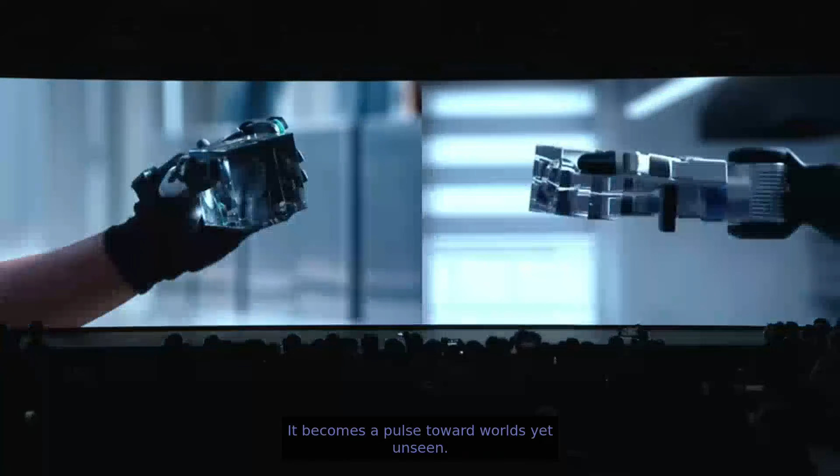Every step forward opens a new path. It becomes a pulse toward worlds yet unseen. Today, robots learn from humanity. Robots learn from robots, and systems learn from systems. We meet as partners to further evolve.

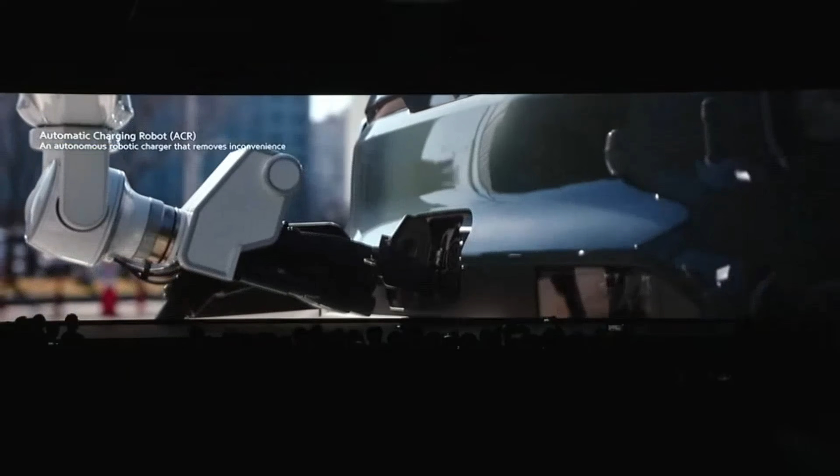With AI robotics at our side, our potential expands, guiding what matters most, giving us courage to push beyond limits, and the collective strength to share the burden. The road ahead brings us a liberated everyday life, safer from risks and freed from repetition. Together, we move forward to achieve the next innovation.

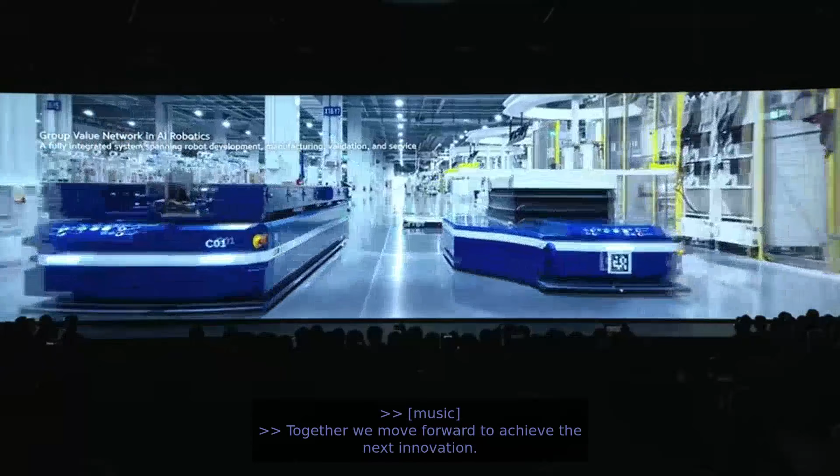Every moment creates a trail of data where humanity and AI robotics open a greater cycle of progress and awaken the dawn of infinite possibility. Partnering human progress.

Good afternoon. I'm Zach Jakowski, and I'm the VP and General Manager for Humanoid Robots at Boston Dynamics. And I'm Aya Durbin. I lead our humanoid application product strategy at Boston Dynamics. Wow, it's incredible to finally show the robots we've worked so hard on at such a big global stage. How do you feel, Aya? I feel the same. I'm excited and honored to be here.

For the last 30 years, Boston Dynamics has pushed the boundaries of the possible. Hundreds of millions of people from around the world have watched our journey online, captivated by the future coming to life before their eyes. And while the robots are impressive, the truth is that many of us joined the company for a simple reason: to change the world for the better.

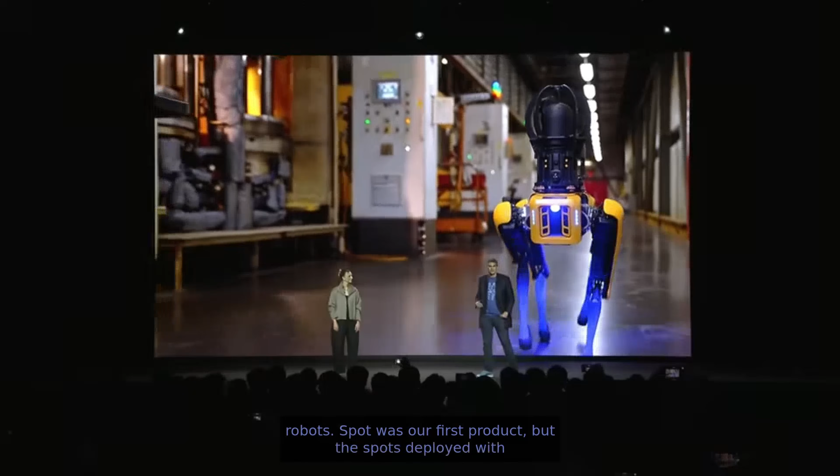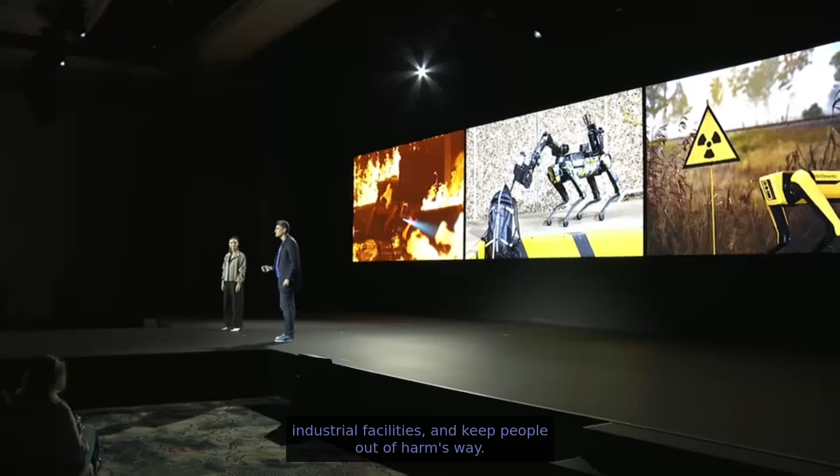Earlier you saw a cool dance performance from our Spot robots. Spot was our first product, but the Spots deployed with customers don't have time to dance. Those Spot robots collect data, reduce downtime in industrial facilities, and keep people out of harm's way. Over the past 5 years, we've deployed thousands of Spots to hundreds of customer sites in over 40 countries. Spot is a serious commercial success.

We launched Stretch in 2023 to bring total flexibility to warehouse automation, starting with truck and container unloading. This is a back-breaking task done in sweltering heat and chilling cold. Stretch has now unloaded more than 20 million boxes for our customers. These are real examples of how the robots we build make workplaces safer and people more productive.

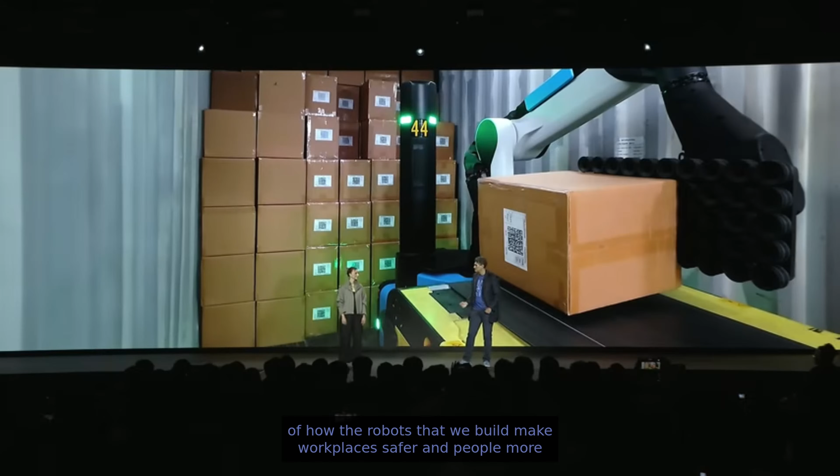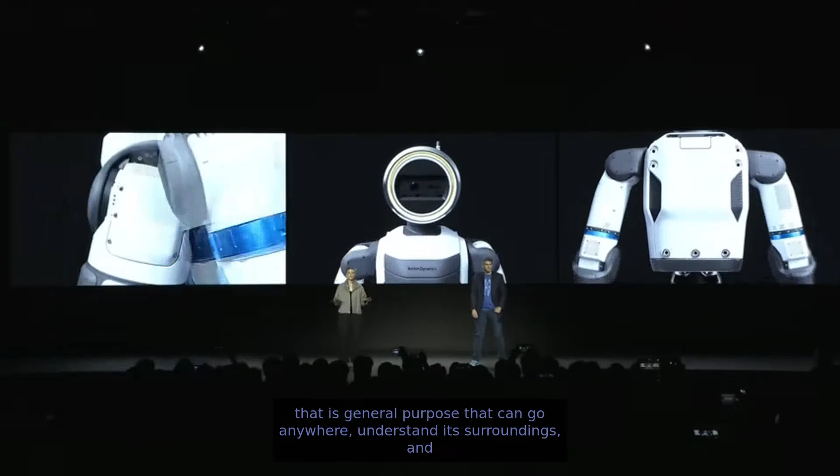So what's next? Our vision is a humanoid that is general purpose, that can go anywhere, understand its surroundings, and manipulate any object. We're starting in industrial environments first, building a tool that can drop into your facility as it exists today. It doesn't just do one job, but is flexible enough to evolve as your business changes.

Over the last few years, we've visited hundreds of customer sites, walking the floors with the people who understand their operations best. We've learned that to bring Atlas from a prototype to a product, it needs to be safe, reliable, and predictable. Atlas needs to be doing jobs that are repetitive, exhausting, and increasingly difficult to staff. As we did with Spot and Stretch, we're partnering with the best in the business, learning directly from the people who will use our products most.

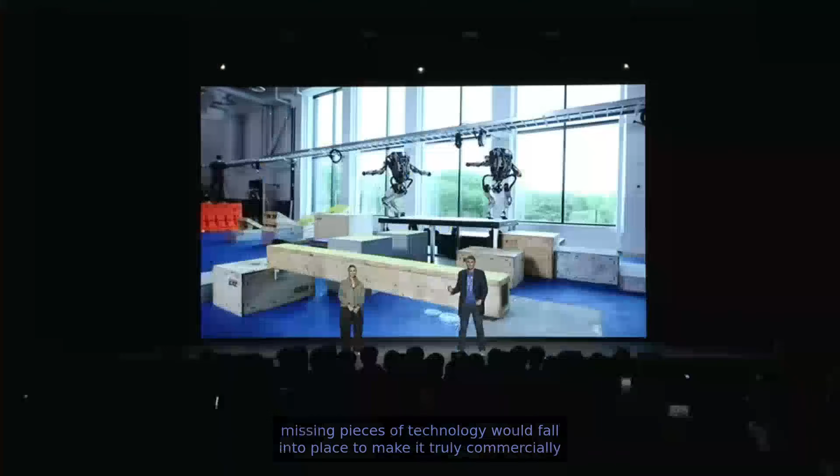But to realize this vision, we needed a robot built for the rigors of industry. We've been working on humanoids for more than a decade at Boston Dynamics, always watching for when the missing pieces of technology would fall into place to make it truly commercially viable. The rapid advancements in AI over the past few years are the piece we needed, and that moment is finally here. Now it's time to officially take Atlas out of the lab. For the first time ever in public, ladies and gentlemen, please welcome Atlas to the stage.

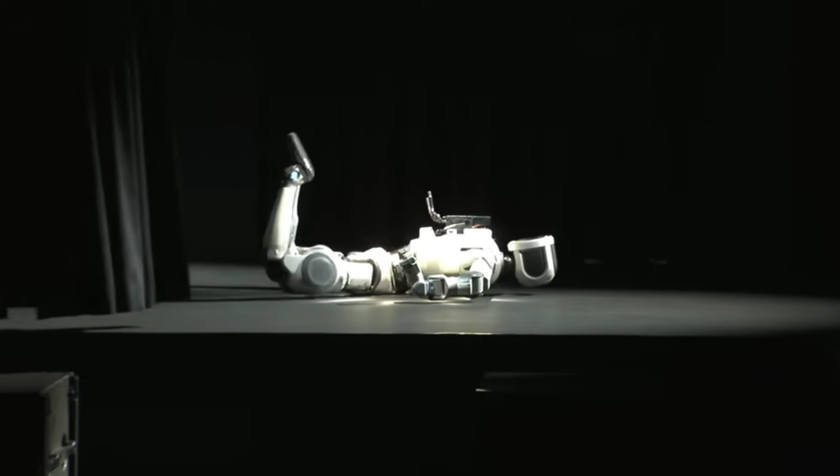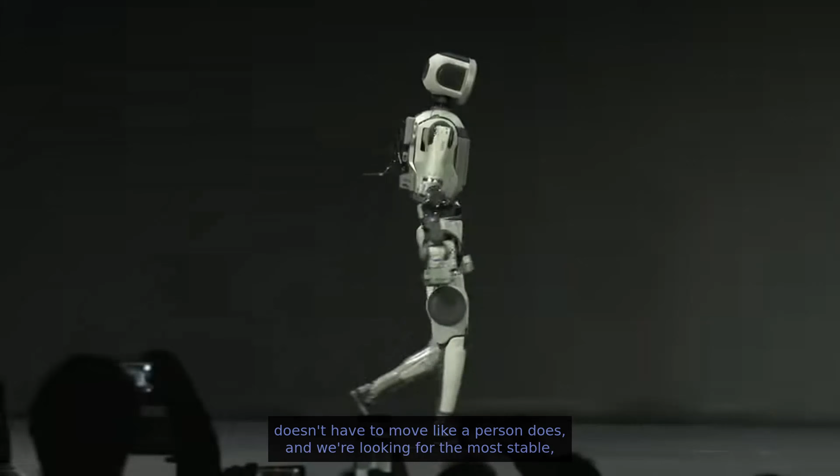So as you can see, Atlas really does stand up the way that we show in our videos online. And we get tons of questions about this. Zach, while we have everyone here, do you want to provide a little bit of insight into how we made that decision? I mean, it's pretty simple. Atlas doesn't have to move like a person does, and we're looking for the most stable, efficient way to get up, and it turns out this is it. The other question we get all the time is how Atlas is moving.

So as you can see, Atlas really does stand up the way that we show in our videos online. And we get tons of questions about this. Zach, while we have everyone here, do you want to provide a little bit of insight into how we made that decision? I mean, it's pretty simple. Atlas doesn't have to move like a person does, and we're looking for the most stable, efficient way to get up, and it turns out this is it. The other question we get all the time is how Atlas is moving.

How is Atlas moving today? In normal operation, Atlas is fully autonomous on a job site, but today, Sarvesh, one of our FAEs, is piloting Atlas on the stage, giving it really simple instructions like forwards and backwards, just to keep things simple.

This is Atlas's first time in public, and as you can see, its walk is pretty natural and pretty smooth. We've partnered with our sister organization, the Robotics and AI Institute, to push the limits on natural walking just for this performance, and I think we've done something really special.

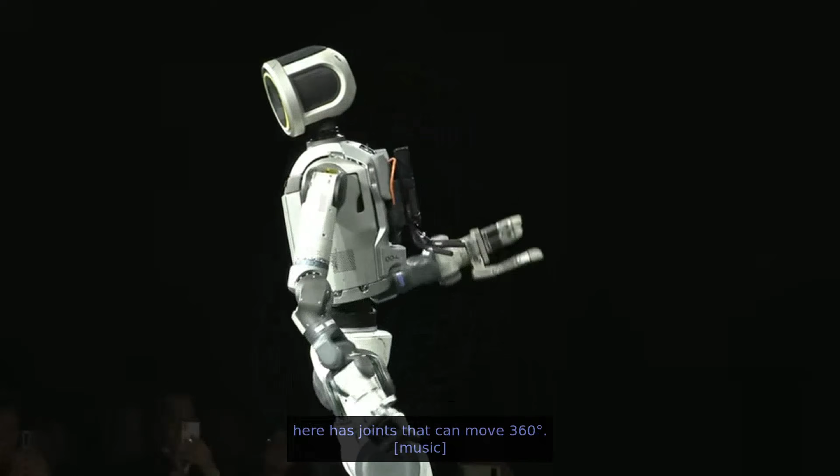We've also been at this robotics thing for a while, and we've learned that there's more to it than just copying nature. We can pick the best parts of what nature has to offer and do better in others. So as you can see, Atlas here has joints that can move 360 degrees. This lets Atlas move even more efficiently than humans, particularly in manufacturing environments where every second counts.

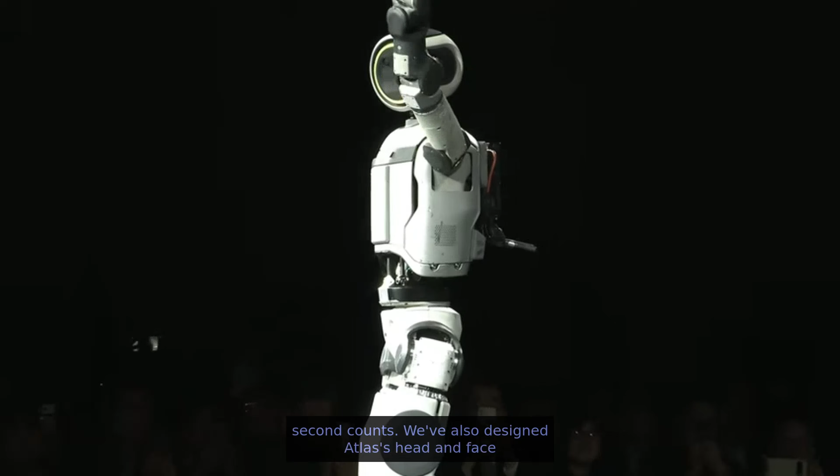We've also designed Atlas's head and face very purposefully. We want folks working with Atlas to know that Atlas is a helpful robot, not a person.

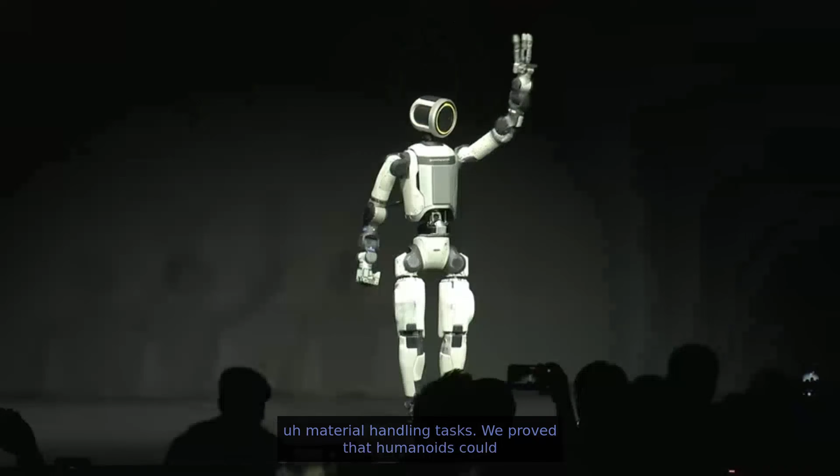Seeing Atlas live in action for the first time is wildly exciting, but seeing it perform real industrial work is even more compelling. We recently took this robot down to the Hyundai Motor Group Metaplant America to have Atlas tested in a real manufacturing facility, where we performed autonomous material handling tasks. We proved that humanoids could be viable in a real-world application, and we collected data and learnings that we took back to Boston to make our product even better.

If you would like to see what one of those applications looks like, we will be running live demonstrations all week long in the Hyundai Motor Group booth at CES. And that's not all. We have been hard at work on the hardware itself. We are building out the functionality that our customers need in a product deployed at scale.

Zach, you want to talk about it? Of course I do. The version of Atlas that you're seeing here is just a research prototype that we've been using for a couple years to understand the system. But we've been hard at work on making the actual product version of Atlas. I can confidently say that this product version of Atlas is the best and actually simplest robot that we have ever built. But rather than just talk about it, why don't we actually show you what it's going to look like?

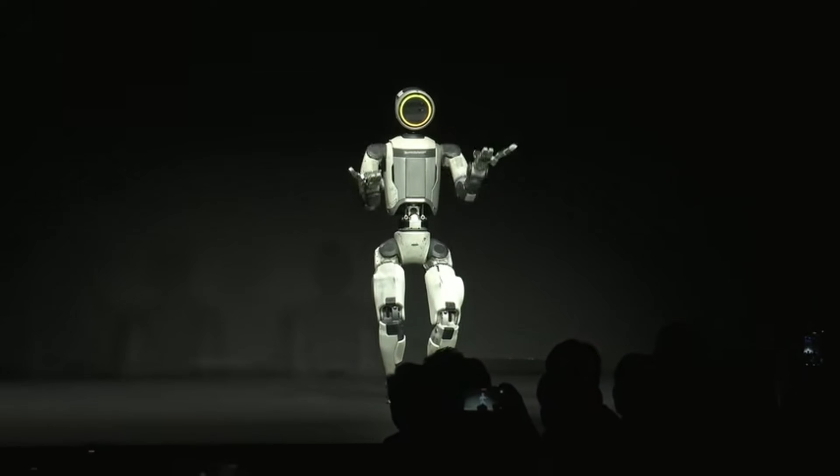Now, obviously, this is a static display robot. We just couldn't pry the actual production samples out of our engineers' hands at the lab this week. So we're going to be showing you videos of that robot in the coming weeks.

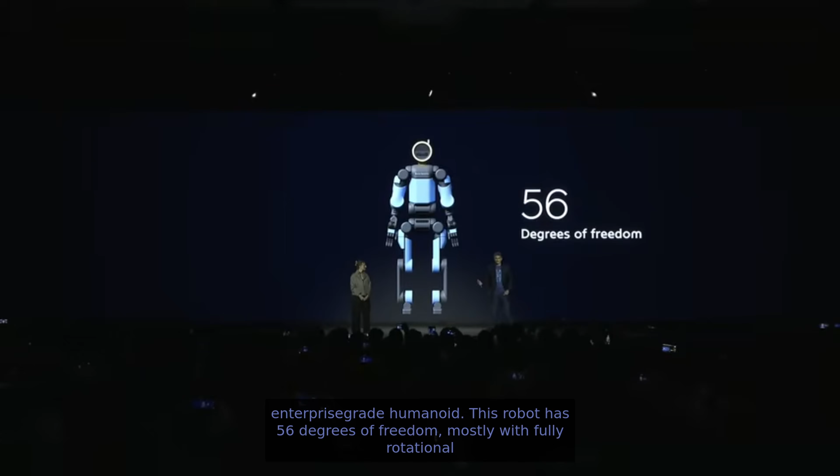This product generation of Atlas surpasses any other enterprise-grade humanoid. This robot has 56 degrees of freedom, mostly with fully rotational joints, and it has human-scale hands with tactile sensing in the fingers and palms for dexterous manipulation.

Atlas's 360-degree cameras see in all directions, so it understands when people are approaching, which is part of our holistic safety concept. Atlas is also strong.

It can lift up to 110 pounds and reach up to 7.5 feet in the air. Atlas is also water resistant. In real industrial environments, robots need to undergo washdowns, and it can operate at its full capabilities, including strength, between -4 and 104 degrees Fahrenheit.

It's going to be easy to teach Atlas new tasks. Most can be trained in less than a day. Atlas can perform these tasks at a reliable, consistent pace for about 4 hours using its dual swappable batteries.

And when they run low, Atlas navigates back to its charging station and swaps its own batteries, getting right back to work. Finally, Atlas robots share intelligence. Through our Orbit platform, once one Atlas learns a skill, it can be shared with any other Atlas.

These industry-leading specs, along with our industry-leading foundation models, allow Atlas to take on challenging tasks that Atlas will do autonomously on its own from day one, assisting people and prioritizing a collaborative, human-centric approach. And as we continue to build out our general-purpose technology, our customers will be able to use our Orbit software to teach Atlas new and specialized skills.

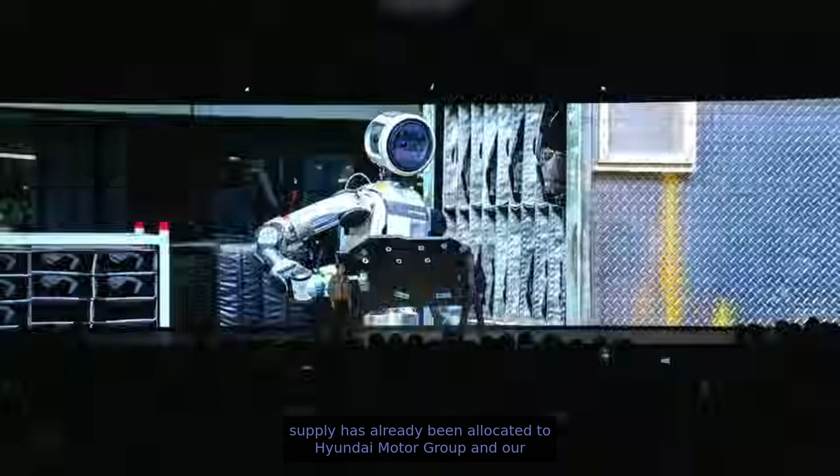We'll add more new customers in 2027. But for now, we're planning additional pilots at Hyundai Motor Group and building a facility that we call the Hyundai Robotics Metaplant Applications Center. This center is the cornerstone of our plan to build the most complete data set in the world to train humanoid skills in manufacturing, creating an engine for deploying tens of thousands of Atlas robots across Hyundai Motor Group facilities worldwide.

It's a data factory. Hyundai Motor Group isn't just deploying the Atlas robots either. They are going to build them. Together, we are building a new robotics factory capable of producing 30,000 Atlas robots a year. This is what's truly required to deliver the full promise of humanoids across the industrial, commercial, and home markets.

We are so excited to bring Atlas into the world. Visit the Hyundai Motor Group booth this week in the Convention Center to see more. And now, to share how Hyundai Motor Group will accelerate Atlas deployment, please welcome Sin-Hyun to the stage.

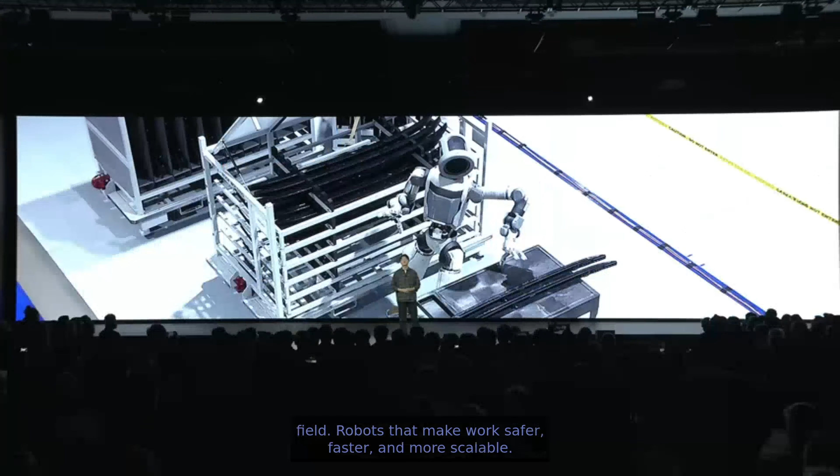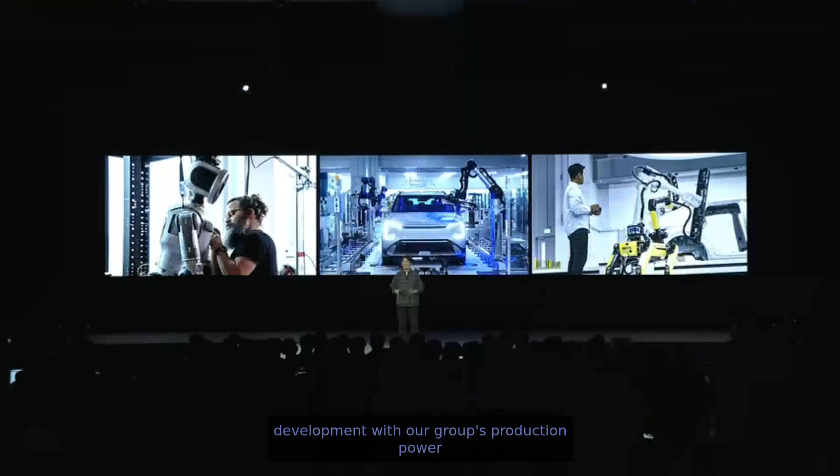Technology not for show, but for real, for measurable, positive impact. We take Boston Dynamics' top research and development with our group's production power. Among all robotics players, this collaboration is unique.

Here, we follow a shared three-step development approach. We are speeding up how our robots learn physical skills. We train them on data from Hyundai Motor Group's factories. Turning data into robot motion requires a central engine. That engine is RMAC, the Robot Metaplant Application Center in the US.

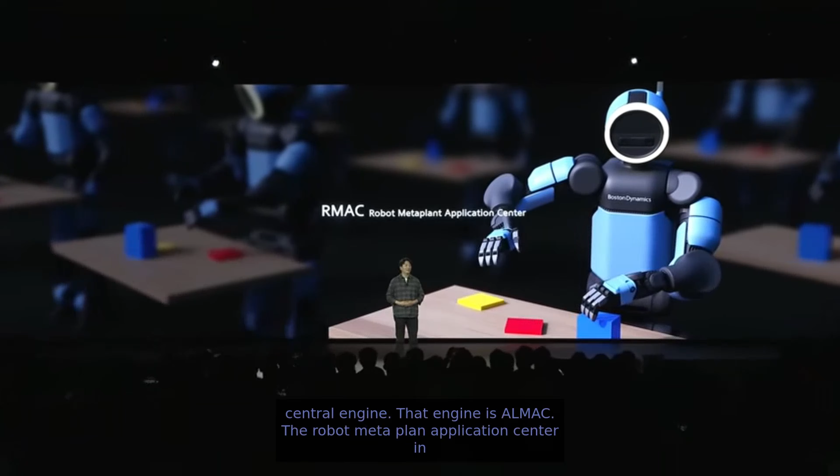RMAC drives robot experimentation, validation, and training. It anchors our robotics business and trains the robotics workforce.

Accelerating physical AI capabilities takes more than a physical hub. It also takes cutting-edge technologies. That's why we partner with cutting-edge global tech leaders. One of these valuable partners is NVIDIA. Their AI infrastructure and development tools help us innovate robots faster, streamline development cycles, and deliver scalable solutions.

We are also activating our group value network affiliates and applying their mass production expertise from cars to robotics. Each affiliate plays a distinct role. Hyundai Motor Company and Kia provide manufacturing infrastructure, process control, and production data. Hyundai Mobis works closely with Boston Dynamics to develop high-performance actuators. By combining their expertise, they're helping standardize key components and build a strong global supply chain for the group's robotics platform.

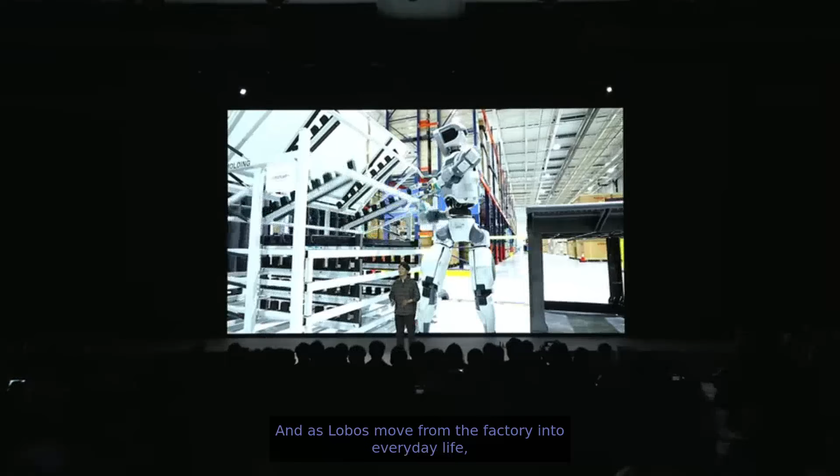And as robots move from the factory into everyday life, this approach will be just as important for people at home, which means robots have to prove themselves in the factory first, then they are allowed to do housework in the home.

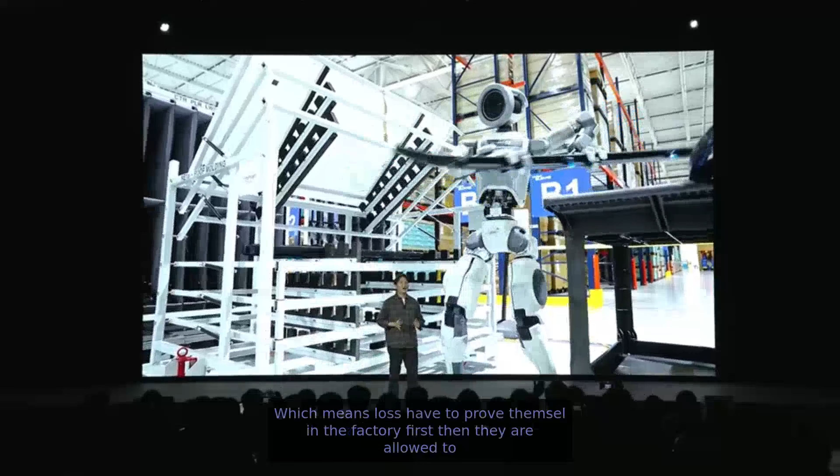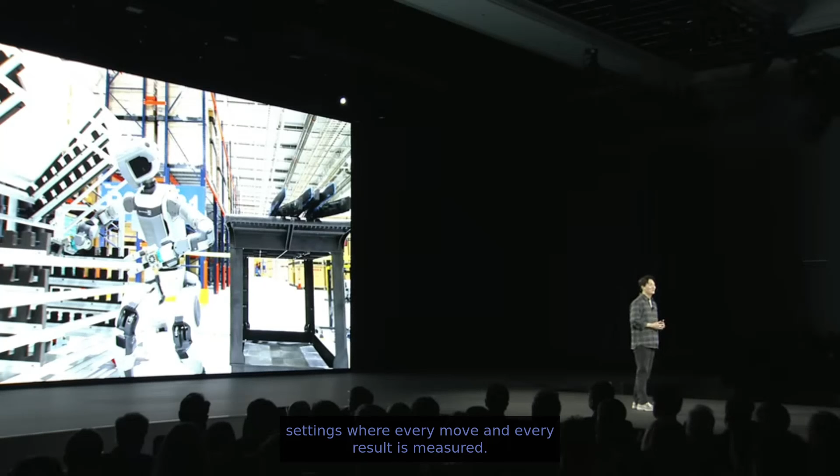Others show staged household robot demos. We prove real performance in industrial settings where every move and every result is measured. That's how we build credibility.

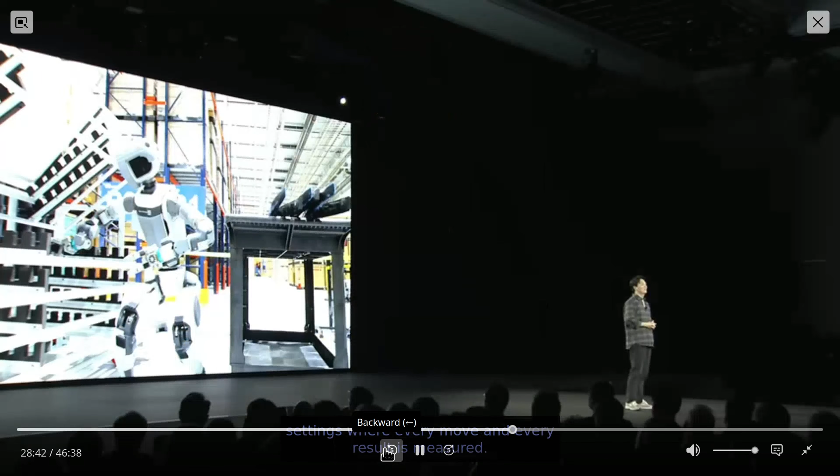Proven inside Hyundai Motor Group, expanded to the world. By 2030, we plan to sell 9.8 million vehicles per year. On that scale, Atlas moved from pilot to mass production, rolling out across our global manufacturing network to support our expansion targets. And the demand will go far beyond manufacturing, like logistics, energy, construction, and facility management, where safe, intelligent, scalable robots add real value.

Today, Spot and Stretch are already operating at customer sites outside Hyundai Motor Group in numerous use cases. In the future, Atlas will play a core part as we expand across diverse industries with a wide variety of applications.

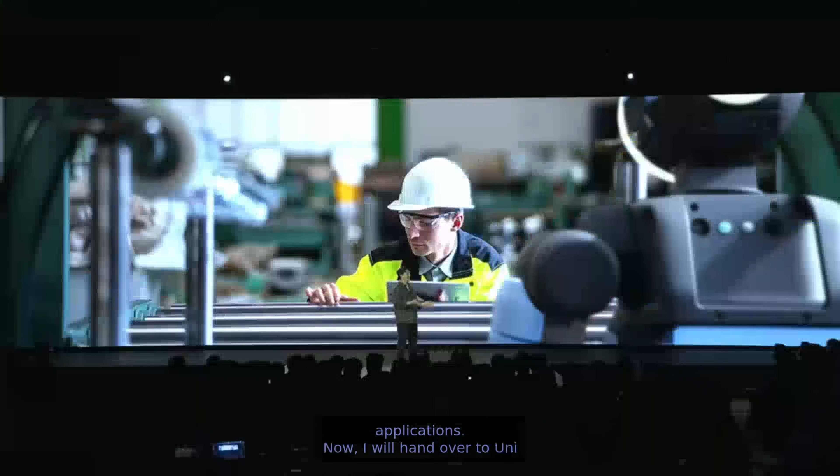Now, I will hand over to Ungjae Lee from Manufacturing Solutions. He will show how we will bring this vision to life, from training to deployment to scaling human-centered AI robots globally. Please welcome my dear colleague, Ungjae Lee.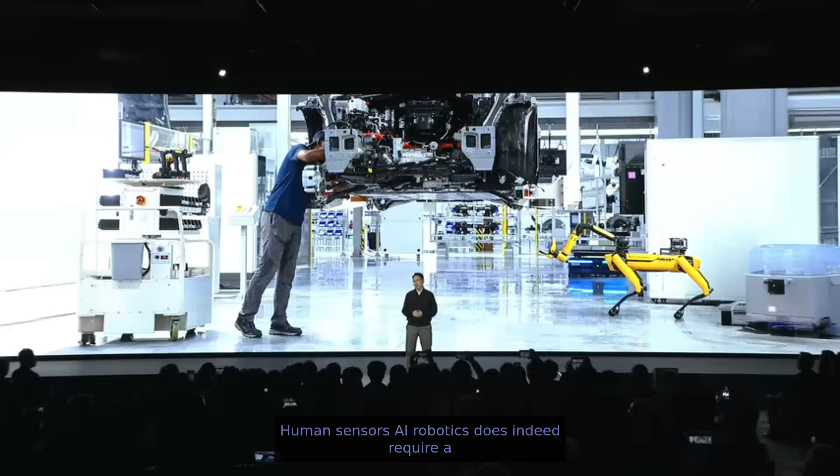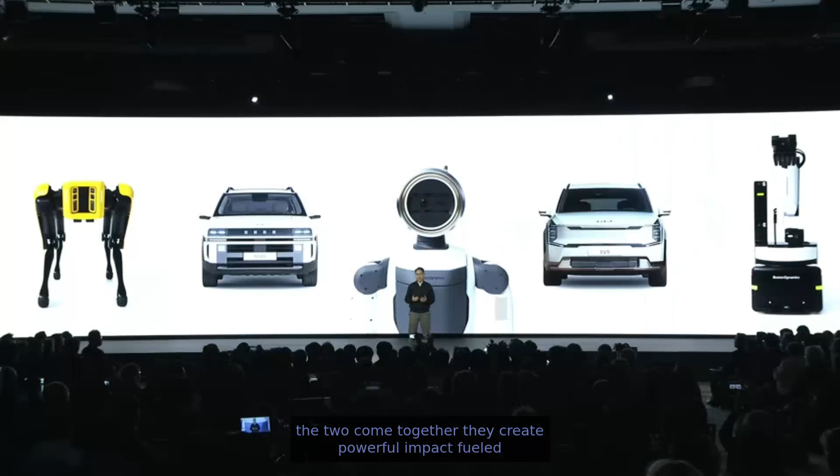Human-centered AI robotics does indeed require a bold vision, and it takes two bold partners to bring that vision to life. Boston Dynamics has world-class problem solvers. Hyundai Motor Group delivers the power of scale in production, and when the two come together, they create powerful impact, fueled by one of the most precious resources of our time: data.

At Hyundai Motor Group, we have a unique advantage. We connect mobility, manufacturing, logistics, and robotics into one integrated loop. This holistic modeling of cross-domain data is changing everything, even factories.

We are shifting from hardware-driven plants to software-defined factories, also known as SDF. They run 24/7. They're more flexible, safer, and smarter. Software lets us update, improve, and share intelligence across our global plant network.

That is how Hyundai Motor Group will grow a connected SDF system, each learning from the others, each lifting the whole network. Our first SDF, HMGICS, is already up and running in Singapore. We'll grow from there, connecting data, people, and technology across every plant in the Hyundai Motor Group.

Our SDF roadmap has one goal: achieve the best for our customers. We aim to adapt faster to local demands, raise product quality beyond today's benchmarks, offer better prices through efficiency, and improve employee safety.

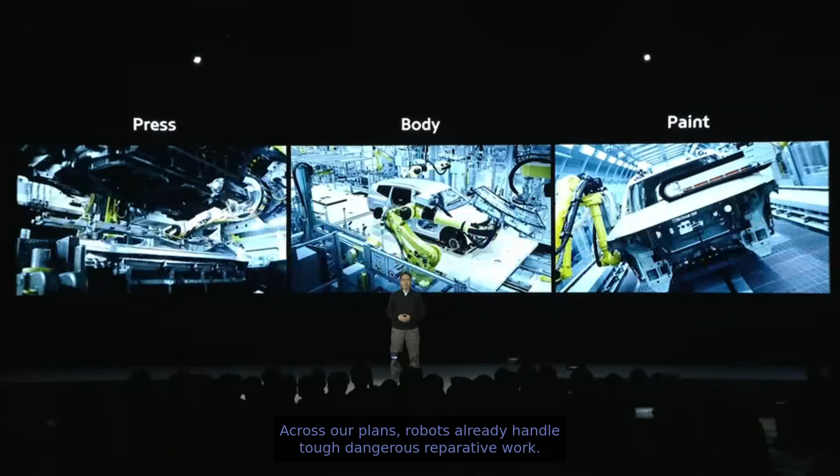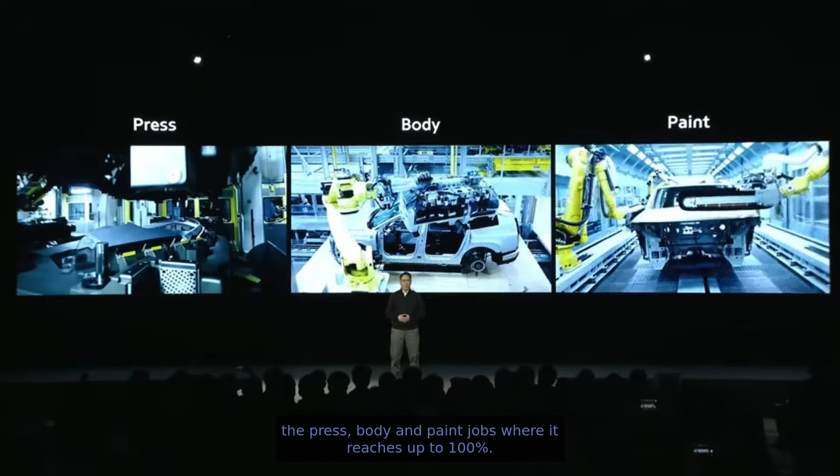SDF is also optimized for better collaboration between humans and robots. Across our plants, robots already handle tough, dangerous, repetitive work. Automation delivers clear benefits in the press, body, and paint shops, where it reaches up to 100%.

It promotes productivity, strengthens quality, and most importantly, keeps people safe. It's the unique approach of Hyundai Motor Group: human-centered automation. Even in a highly automated era, people remain essential, supervising, guiding, and maintaining robot colleagues, always retaining full control.

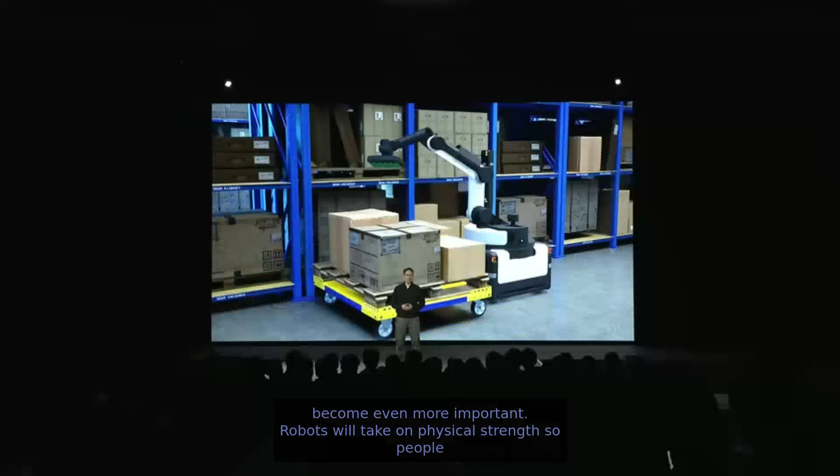As automation grows, the human role will become even more important. Robots will take on physical strain, so people can focus on oversight, decision-making, and problem solving. People will lead through software, using digital twins to test scenarios, adjusting workflow with data-driven precision.

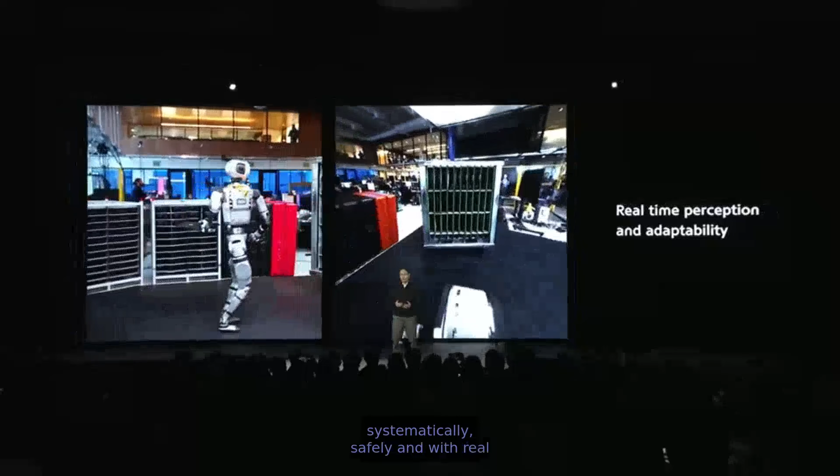But this doesn't happen overnight. The tasks must be trained systematically, safely, and with real-world context. That's the purpose of RMAC, which will be located here in the US.

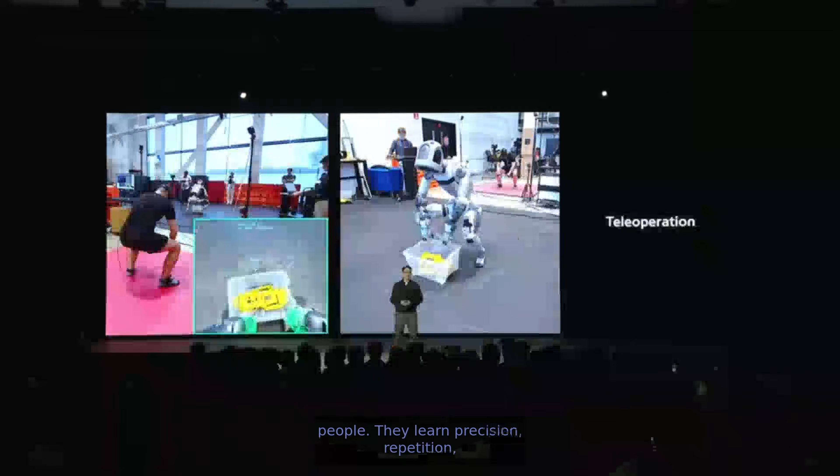RMAC is where robots learn to work with people. They learn precision, repetition, and safety by mapping human movement into robot learning. Every lead, turn, and recovery motion, all captured as real operational data.

No company has more real-world factory data than Hyundai Motor Group because our SDF network is global and well-connected. This data creates better training. Better training creates safer, smarter robots, and smarter robots create better factories for people. Big input, great output. Our roadmap is clear.

The RMAC opens this August and creates the basis for future robots. By 2028, the Atlas global rollout begins within our SDF network. Atlas will start to perform high-precision sequencing tasks. By 2030, robots will handle complex assembly.

Together, with our robot colleagues, work is safer, lighter, and more meaningful. Because our robots don't compete with humans, they compete for humans. For our safety, efficiency, and well-being. This is the Hyundai Motor Group's robotics philosophy. Robots expanding human reach and partnering for human progress.

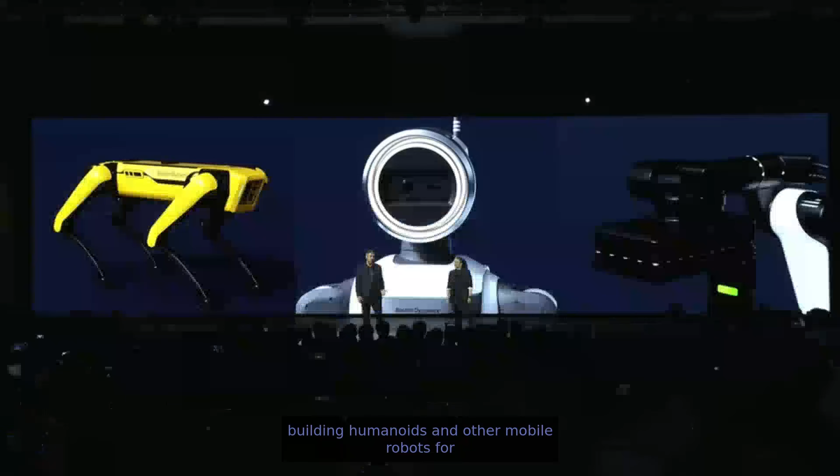At Boston Dynamics, we've been building humanoids and other mobile robots for more than two decades now, and a central focus of our work has always been physical intelligence. So imbuing our robots with a mastery of force and motion that has allowed us to demonstrate incredible athletic feats, as well as deploy them in real-world environments where they work for months at a time without failure. And all that work has led us to here, to today, to the new generation of Atlas, the world's most physically capable humanoid robot.

But making Atlas into a product requires more than athletic performance. For humanoids to really deliver on their promise, they have to be able to interact with people naturally. They have to be able to understand and adapt to ever-changing real-world environments, and they have to be able to accomplish real complex dexterous manipulation tasks. And I hope you agree with me that recent advancements in AI have created a clear path to get to those capabilities, which has spurred our commercialization journey for Atlas.

And that's why I'm so excited about announcing today our partnership with Google DeepMind's robotics team. This partnership sits at the world's leading intersection of robotics and AI. And we believe it will take us to a new era of human-centered AI robotics. What do you think, Carolina?

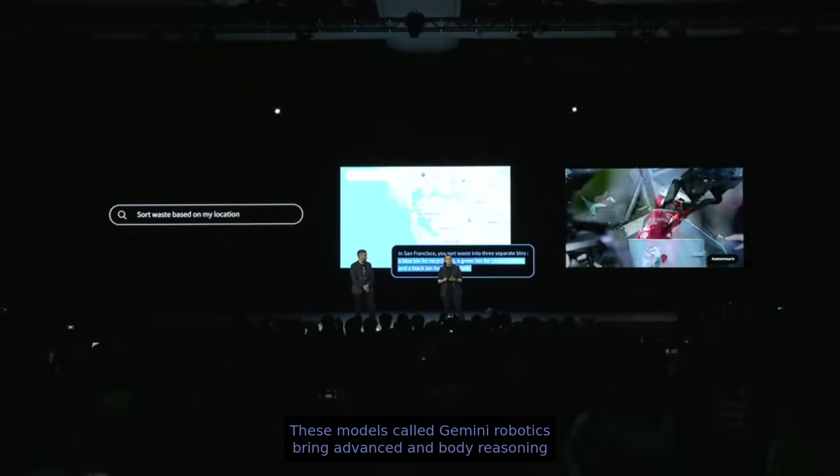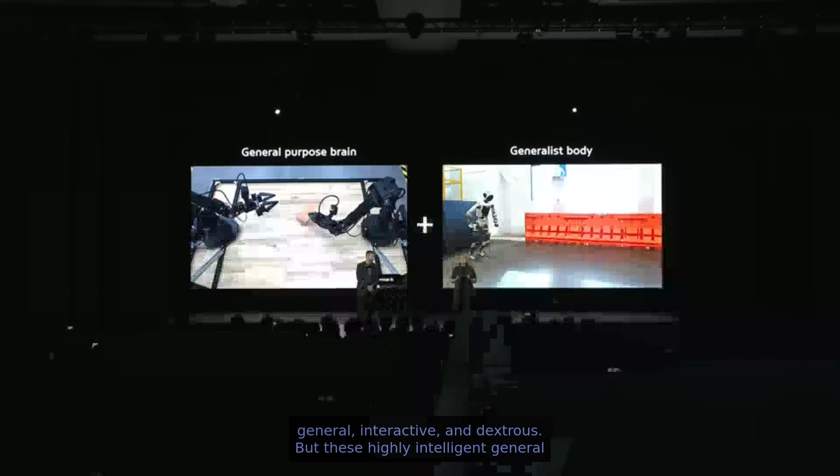These models, called Gemini Robotics, bring advanced embodied reasoning and generate actions that can directly control a robot in a way that is general, interactive, and dexterous. But these highly intelligent general-purpose robot brains are most powerful when combined with a highly capable generalist body. And that is what brought us together.

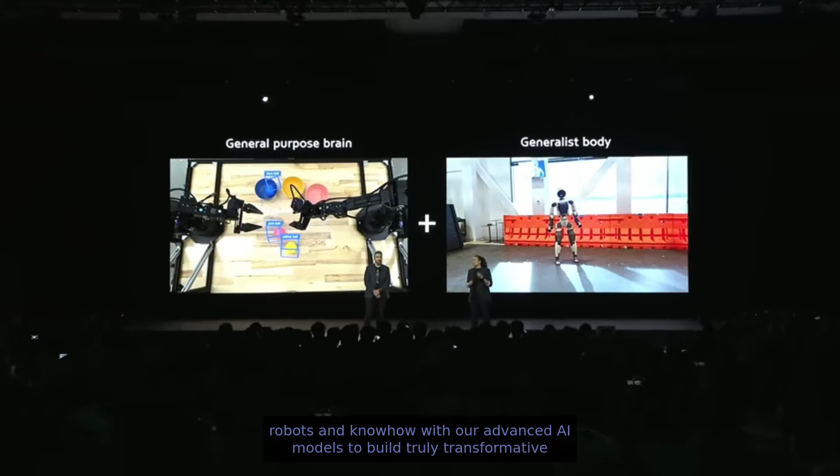Boston Dynamics has defined the leading edge of robotics for decades, and we can't wait to work with them. We want to bring together the remarkable robots and know-how with our advanced AI models to build truly transformative robots. That's our vision for this collaboration with Boston Dynamics. We're looking to integrate our cutting-edge AI foundation models with Boston Dynamics' new Atlas robots.

And we'll aim to develop the world's most advanced robot foundation model to fulfill the promise of true general-purpose humanoids. We're going to bring together the deep expertise in robotics and AI from both teams, and develop next-generation humanoids that combine the world-leading generalization and reasoning capabilities of Gemini with the strength, speed, fluidity, and reliability that characterize Boston Dynamics robots.

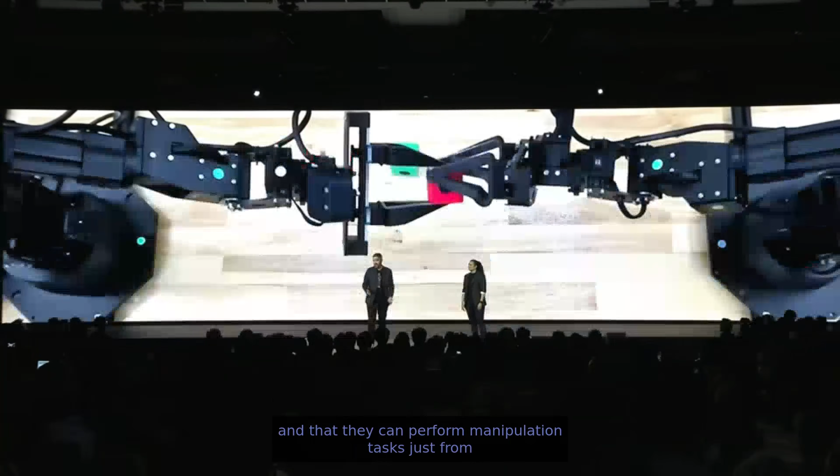The DeepMind robotics team has already shown that robots can generalize to new scenarios and perform manipulation tasks just from simple language instructions. One of the core goals of this partnership is to significantly expand the scope of that generalization to include a much larger set of complex real-world tasks, like the ones you'll see Atlas performing this week at our booth at CES.

Rather than having a set of predefined tasks loaded onto the robot, we think robots should understand the physical world the same way we do. They should be able to learn from their experience, generalize to new situations, and get better over time. So whether it's assembling a new car part or tying your shoelaces, robots should learn the same way we do, from a handful of examples, and then get better very quickly with a little bit of practice.

And building these models is critical, both for reliability and scale. The ability to easily onboard new tasks, or for our robots to improve their performance over time on their own, or to react to any unexpected things the world puts in front of them, are all key to successful large-scale deployments of this technology.

Robots should be able to onboard new tasks in one day, and they should be able to perform those tasks for hours on end. We think that Atlas, with its endurance, strength, and unique mobility, gives us an opportunity to even go beyond human performance in many cases.